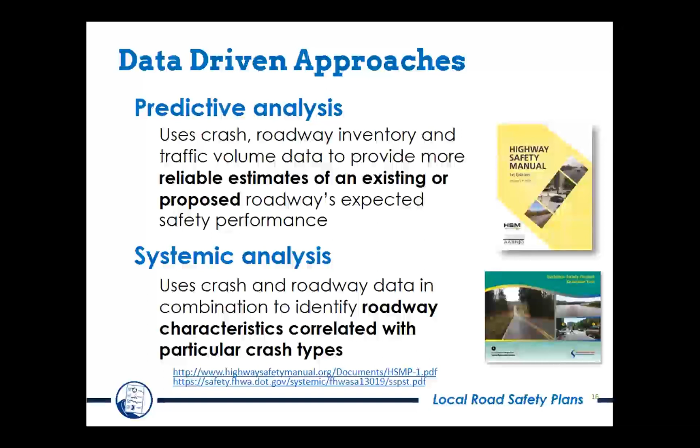So, very rigorous approach. Just to tell you a little more about systemic safety, really our systemic analysis comes from medicine. They've done this in health for quite some time. If you think back to the last time you went to the doctor's office, before you even saw the doctor, you filled out a form, right? They wanted to know about your family's medical history, what happened to your grandparents, your parents.

They wanted to know about your personal health history. How often do you exercise? How often do you drink alcohol? Are you a smoker? Then they might have you test your blood just to see what that shows. That's all before you actually get into the doctor's room, right? They even check your height and your weight. That really helps them look at your risk profile and what you might be susceptible for.

So, if I go in there and they find out that my grandparents all died from heart attacks, that my dad is suffering from heart disease right now, that I'm overweight, I don't exercise, and I drink too much, they're going to start really looking at my heart and making sure I'm okay, right?

They might even put me on some preventative medicines, like for my cholesterol or something like that. What they're not going to tell me is, well, if you start having chest pains, just come back then and we'll take a look, right? But how many times do we do that with crashes? We think, well, one happened or no crashes have happened. We really need to wait till something happens.

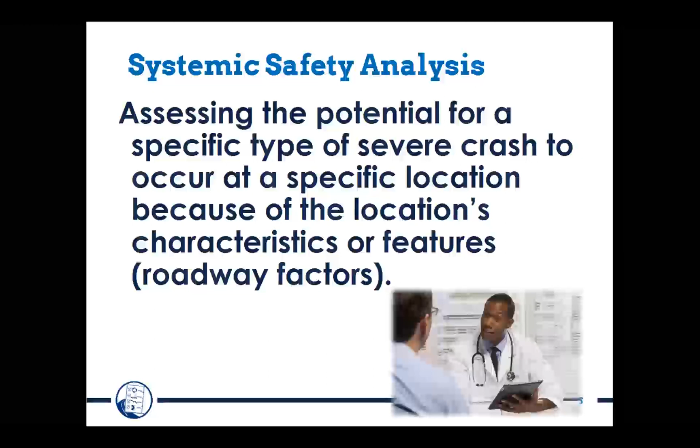And so we can apply this systemic approach to our roadways. In fact, we have an infographic that talks about that, where it looks at the health of your road system, just looking at things that you have access to. This happens to be for curves.

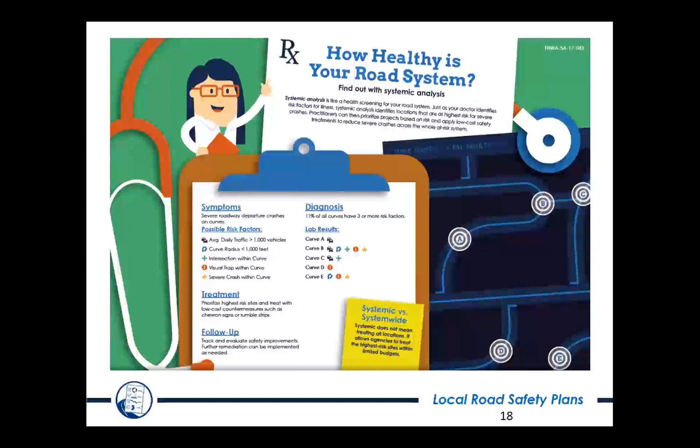So we're talking about traffic volumes. You don't have to have detailed numbers there. Curve radiuses, intersections within a curve. We know that causes crashes. What we call visual traps, where it looks like the road goes straight, but it actually curves. And then using that crash data that you do have can be helpful as well. So that's been a great approach for us.

We do have a local road safety plan template. This is borrowed from the tribal transportation plans. So this can be a great guide for you to work through your plan. Even if you hire a consultant, this could be something that they can use or something that sort of helps guide you through that process.

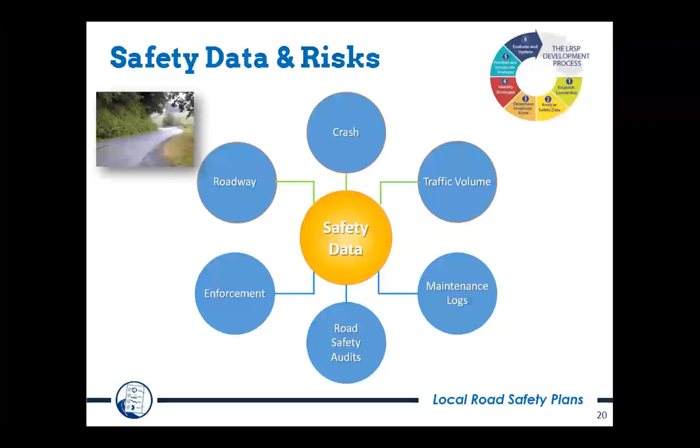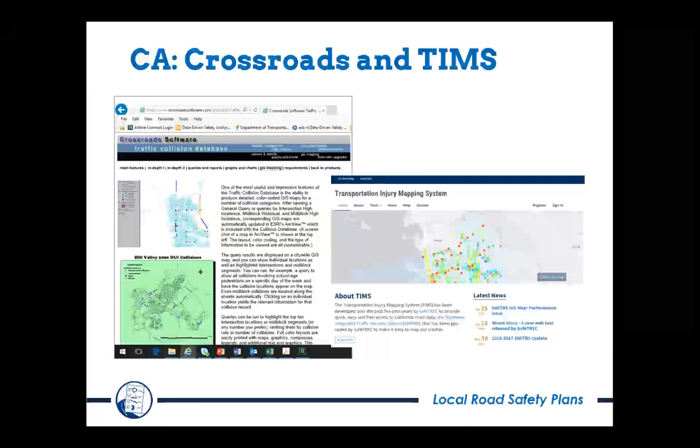So just touching on that data again, you don't have to have great data. A lot of times our own agencies have data, right? Our maintenance forces have data. We have sign inventory. So we might know a lot more than we really think we do. And we want to leverage that information. So in California, you guys have great information with Crossroads or TIMS. It was really great to work with you guys on your data systems. Not all states are at that level, I'd say.

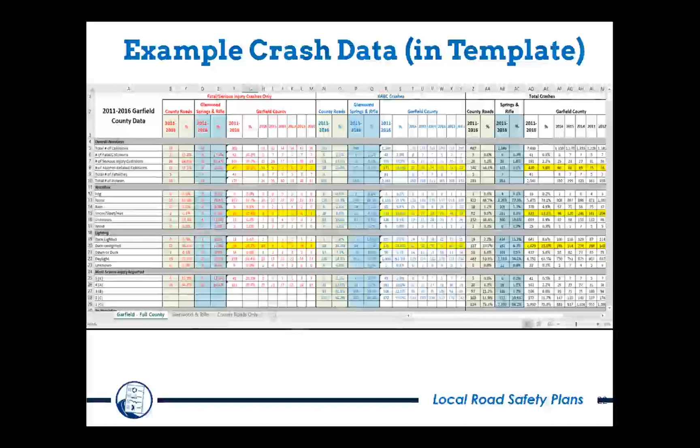We've seen a lot with curves and that have come up, some improper turning. You'll hear some of those as we talk about, or you hear from the others today.

We've also taken a lot of that information and really put it into what we call crash trees. Again, just looking at the data in maybe a slightly different way to look and see where those issues are. So in Garfield County, it was more non-intersection type crashes. They were in rural areas. They were happening during daytime, and a lot of them involving overturning, right? So that's something that helps us kind of figure out where we might focus.

And so we could look at shoulder treatments, maybe clear zone treatments, things you're going to hear about towards the end of today's presentation from Dick Albin.

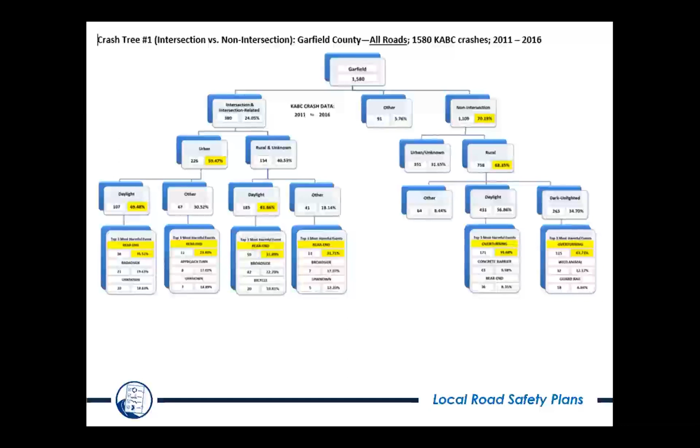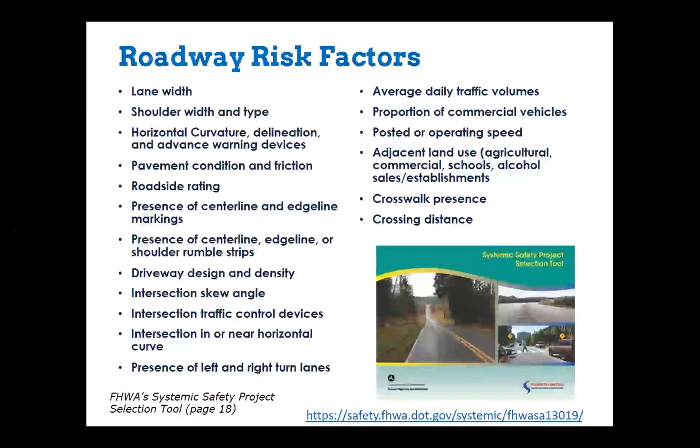So this really can be applied in various areas. So this is just sort of a laundry list, but if you were looking at, say, pedestrian areas, things like the type of intersection control would be a good risk factor. Is there a crosswalk that's present? How many lanes does a pedestrian need to cross at one time? Are there pedestrian signals? If so, what type are they? Is there a sidewalk that's present? What's the adjacent land use? Is there generators for pedestrians? Is there alcohol institutions, those kind of things? Is there lighting? Those can be great risk factors for pedestrians. So things to keep in mind.

Once you've identified those risk factors and determined where those exist on your system, then we can really turn to our proven safety countermeasures. FHWA has a list of 20 proven safety countermeasures.

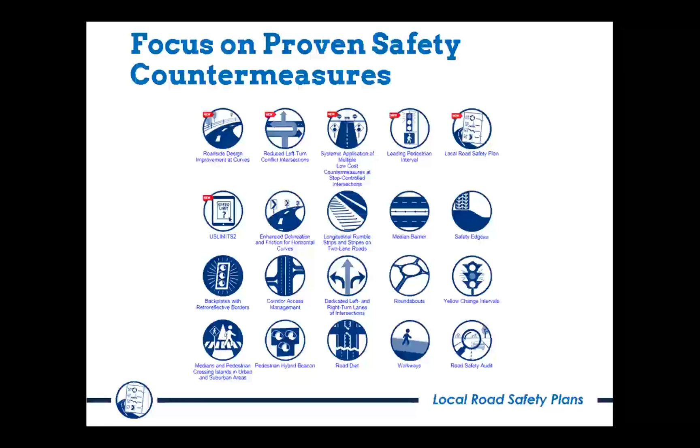There's 6 brand new ones you see there at the top that can deal with those kind of day-to-day things. These are all low-cost type improvements that can be implemented on a wide basis, looking at that at-risk system to effectively address those crashes. Our sister agency, NHTSA, also has a document called Countermeasures That Work that can be helpful for law enforcement, looking at those treatments or strategies that might be effective to help on that human behavior side. There's a number of resources.

I know Caltrans has a number of resources on their website as well. I think plans are a great resource, but we can provide some links to that information if you need. I know the template is on the California's website as well. So we certainly look at implementation, right? That's key. A plan by itself doesn't save anyone. And so we certainly want to talk about those things. And that's really where the plan can help get us to implementation.

This is just one example from Thurston County, Washington. Scott Davis, if you know him, has been a part of our team on the NACE side. Scott Davis has been a safety champion his whole career, but until he looked at this data in this way, he didn't realize his county was experiencing more crashes at curves than his peer group, than the rest of the counties. And so they ended up looking at all their curves. They had 270 that they identified for improvements. They used those proven countermeasures, things like chevrons, horizontal alignment signs, enhanced edge lines, maybe rumble strips, and he got a 35% reduction in his targeted crashes there. So really effective in what he's been able to do.

As I mentioned, we've got some great California local road safety plans. You're going to hear from 2 of those that participated in the pilot and 3 that are really, I think, outstanding. So I won't take much time there. I hope some of your agencies participated in a peer exchange that we hosted in February, that Sac State hosted, that we helped speak at and helped with the agendas. We have another one of those opportunities coming up in October that will be more geared to those southern agencies there in Camarillo. So mark your calendars.

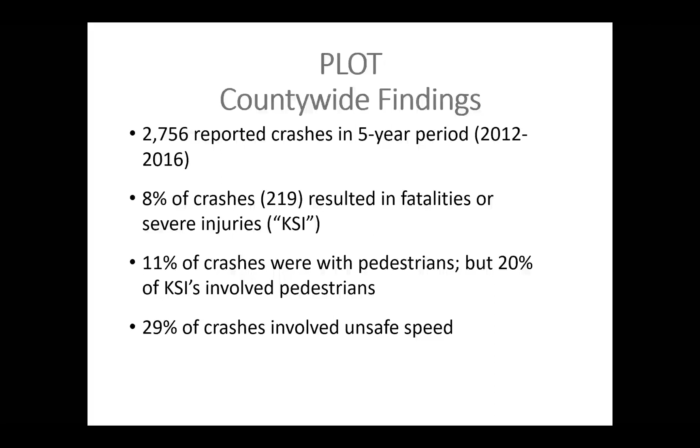Some findings from the report: over the five years, 8% of crashes were fatal or severe injuries, but 11% involved pedestrians, and 20% of killed or serious injuries involved pedestrians, and about 29% of crashes involved unsafe speed.

In terms of our proactive collision analysis, we identified a list of high-risk locations of collision patterns and developed a list of countermeasures to address those, both low-cost short-term and higher-cost long-term.

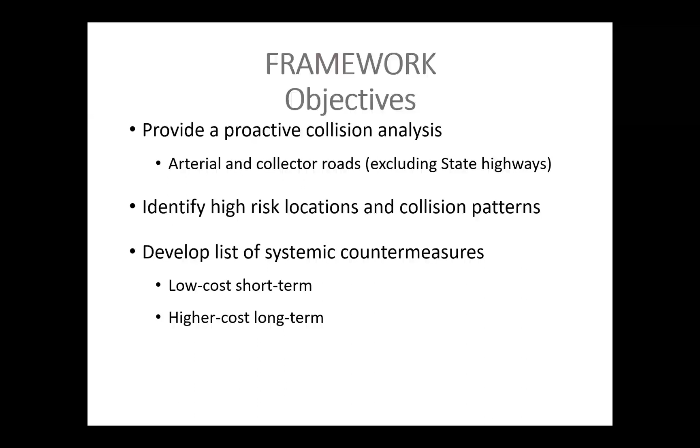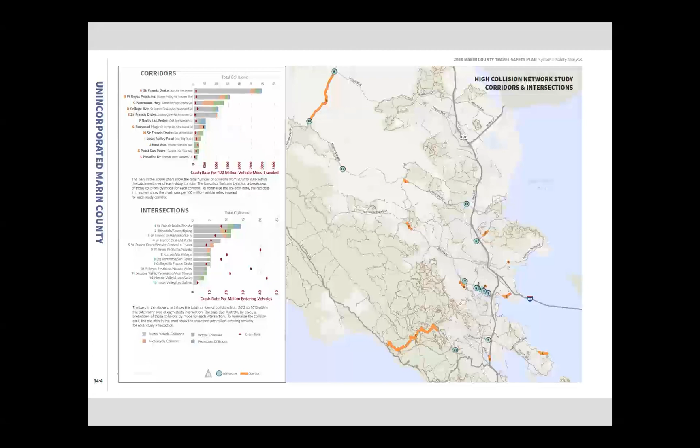This is a sample of the corridors and intersections where we identified high-risk locations of collisions. We broke it down so each city and town would get a list of 10 locations for collision road segments and collision intersections that had high numbers of collisions or were predicted to have a high risk of potential collision. We worked with the different agencies to prepare an individual chapter providing a summary that identified those 10 locations and countermeasures.

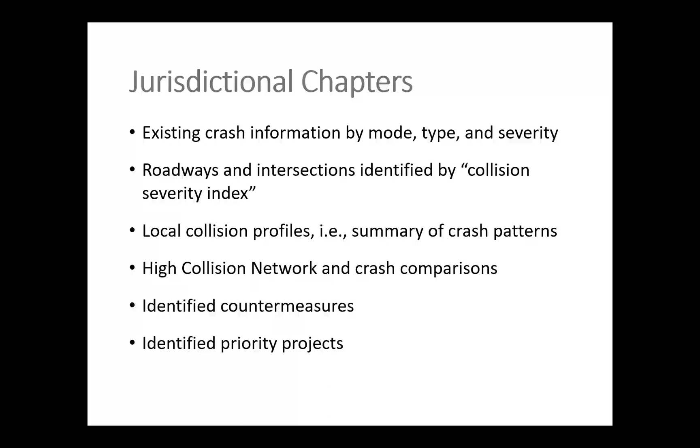We further worked with the jurisdictions to prepare a prioritized list of locations and intersections they would consider for improvements.

In terms of mode, our motorcycle collisions were 11% and our bicycle collisions were 22%, which was much higher than other jurisdictions within Marin County.

Some of the other jurisdictions, the cities and towns, had more pedestrian collisions than average. So we had a bit of conflict in the story, in terms of what to focus on for a regional priority.

One area in Marin County was a high number of solo bicycle, solo motorcycle, and solo motor vehicle collisions, which came as somewhat of a surprise. I was expecting solo motorcycle run-off-the-road at curves, but the solo motorcycle and especially the bicycle numbers were a bit of a surprise.

We found a number of steep roads with bicyclists taking the downhill very fast and sometimes losing control of their bicycle, not even necessarily at a curve.

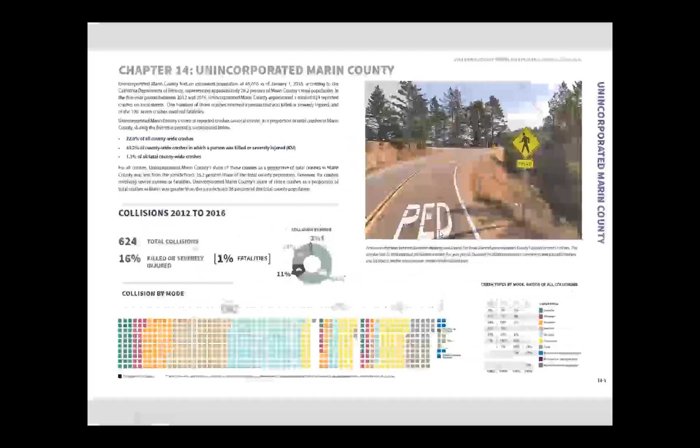This is another sample of the summary sheet showing how we presented the data to the Board of Supervisors and others, to develop further plans and work with our agencies and law enforcement.

Again, we identified the countermeasures, broke them down into potential projects by corridor and intersection, and then ranked them. These would be the priority projects and countermeasures for the unincorporated area.

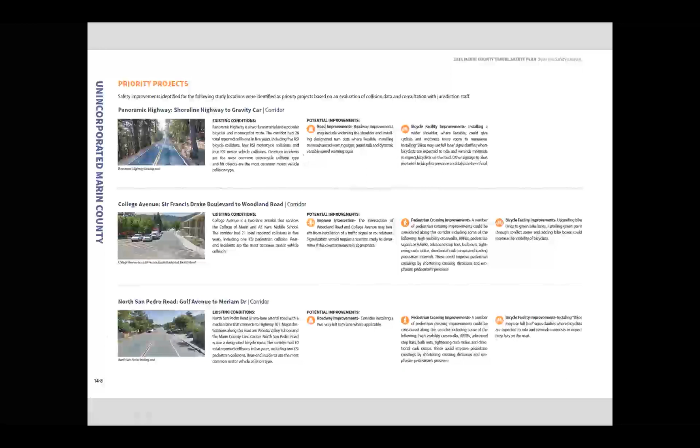And then here's a sample of how we presented the priority projects, where we discussed the existing conditions, potential improvements, and broke it down by road improvements or bicycle, broke it down by mode, so we could focus on the trend as well as the engineering improvement or capital improvement.

And this is the hook for the next steps, is what we did with the information that we gathered from our systemic safety analysis and travel safety plans. We applied for 3 highway safety improvement program projects, and were actually awarded the 3 in which we applied for. We did this countywide, so it wasn't just the unincorporated area. So each of the cities had their 3 priority projects, but we worked together with consultants to identify what were the highest priority projects for the region as a whole. 2 of which were in our cities.

San Rafael and Novato had engineering projects that included some pedestrian improvements. But we also identified through a systemic analysis 26 intersections with signalized intersection improvements, including flashing countdown heads, lead pedestrian intervals, back plates, and other items to help improve safety at those intersections identified in the report.

We're continuing to work collaboratively together with our various agencies and jurisdictions to identify region-wide goals, each of which there's interest in continuing to contribute, such as developing maybe as a region towards 0 deaths or Vision Zero policy with objectives. We're also discussing education, media programs to focus on some of the trends such as pedestrian, bicycle, or motorcycle collisions that had high numbers of killed or serious injury collisions. And we're working to develop the work plan and guiding principles to implement this, which we hope to have completed by the end of this calendar year.

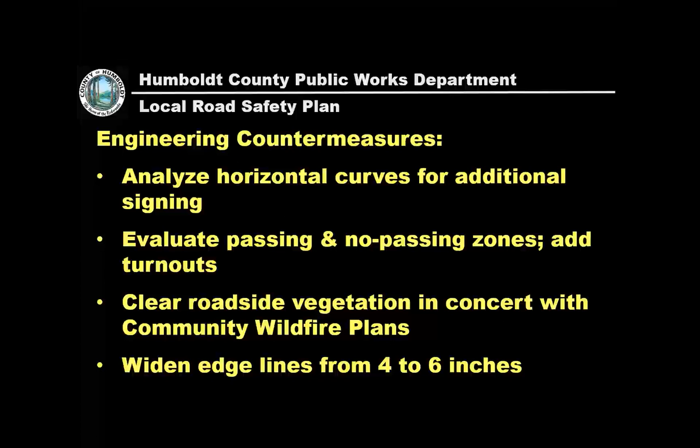As you can see, this guy was tired of his house getting hit, so he put up bollards in front of his house, and nothing has happened since. But we're very concerned about somebody hitting those bollards - it's on private property.

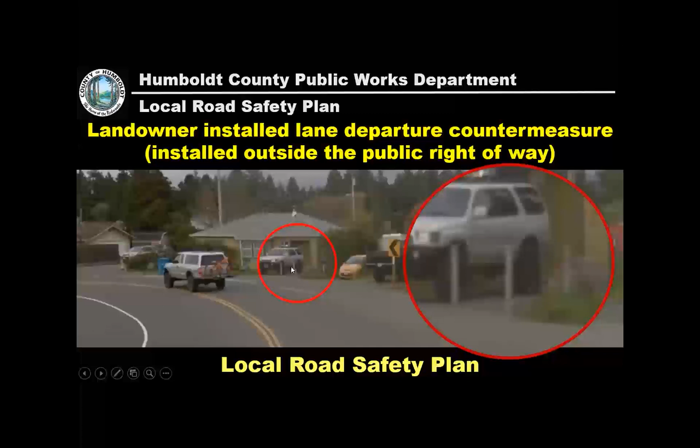And despite all the engineering in the world, DUI is still a problem. Tessa was 16 years old when she was crushed to death by a repeat drunk driver. As an engineer, we think, what can we do about that? Not a lot. Well, you can. In Humboldt County, DUIs are about 16% of all our crashes, but 38% of our fatal and severe crashes. So reach out of your box.

Under the state highway's strategic highway safety plan, there's an alcohol challenge area. I'm trying to bring our county together, and I've got good support from our district attorney, public defender, probation, and sheriff to develop what's known as a 24/7 pilot program for repeat DUI offenders. It's not anything Public Works is really going to be involved in, other than I went out and found a tool nobody else is using to bring to my community. The 24/7 pilot program hopefully will move forward - it's got dramatic effects in reducing recidivism with DUIs, which is also why my public safety officials like it. It has a lot of positive effects on other alcohol-related crimes, such as domestic violence.

So Julio, you can bring your presentation up. It's important that we not only have an overall state strategic highway safety plan, but we have these, what I call a mini SHSP, or local road safety plans, that are applicable to what is most important to the locals. And that's what you're seeing here today.

I'm also going to put in, just before Julio starts, a plug for anybody that's interested in being involved in the California Strategic Highway Safety Plan. Tom Matson is a member of the steering committee. He's on a couple of different challenge areas, as well as myself and some other people in the room here. We need more local participants.

The majority of fatals and severe injuries happen on local roads, and unless we have that participation from the locals, your voices aren't going to be heard. The actions that we propose are going to be focused more on the state system versus on the local system.

So if anybody's interested, there's somebody like Tom Matson that you can contact. You can contact myself. You can Google California SHSP, and that'll bring you to the web link, and it'll tell you how you can sign up for different challenge areas through that link. So again, really encourage you to take a look at that if you believe in our goal of towards zero deaths.

So the first 2 presentations you heard as far as examples, those were developed from local road safety plans. The last presenter, as far as a local example, is Julio from the city of San Diego. His plan was developed from the SSARP process. So you're probably not going to see a lot of education enforcement, which the local road safety plan does include the 3 E's: education, enforcement, and engineering, whereas the SSARP is going to focus more on engineering. So with that, Julio, I'll turn it over to you, and we'll see how this goes.

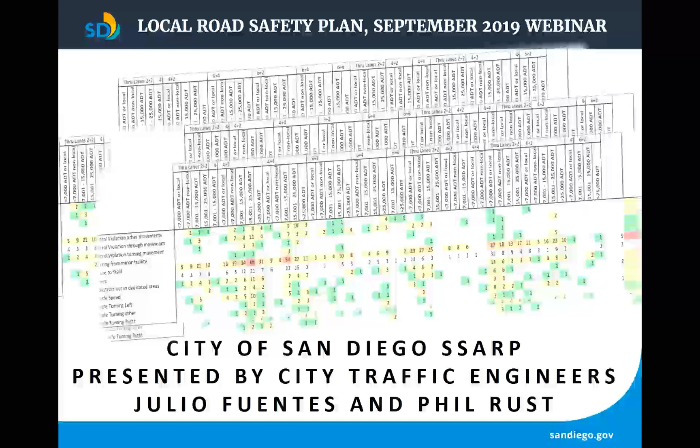Initially, our analysis involved 3 years of crash data from 2014 to 2016, containing approximately 24,000 individual crash reports. In looking at the total number of crashes available, it became clear to us that we should focus on injury crashes. Removing property damage only crashes still left us approximately 12,000 injury crashes, which is enough to obtain statistically significant results. As we will explain later in this presentation, focusing on injuries is the basis for a Vision Zero approach to this SSARP project.

The SSARP methodology is about grouping high crash locations that have similar traits. Instead of the traditional way of looking at individual locations and trying to find crash patterns, we are now looking at crash types across the city network and seeking shared physical features connected with them.

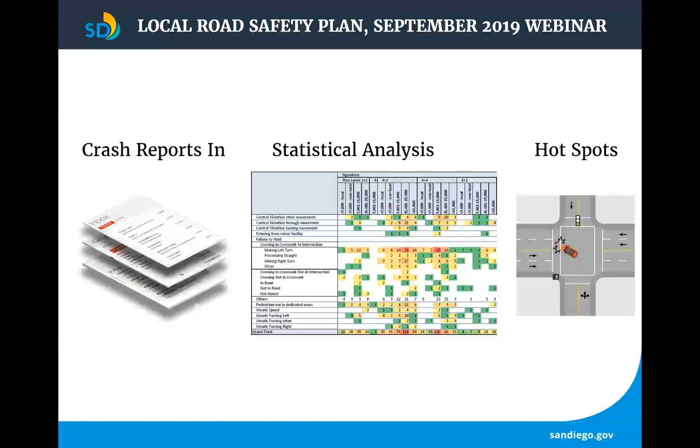A key benefit of systemic safety analysis is that the results yield many locations, which can be improved with low-cost countermeasures. These low-cost countermeasures can cover a much wider area and are focused on correcting or improving a specific crash type. This approach may not be quite as effective as other more expensive options at a single location, but since it is effective at so many more locations, there is a greater potential return on the investment.

The data is first separated by location. This is important as different countermeasures will be considered depending on where the crashes happen. The settings are the intersections, the intersection influence areas, and mid-block locations.

The initial look at the data showed that most crashes, including severe and fatal, are concentrated at intersections. Therefore, our analysis is focused at intersections.

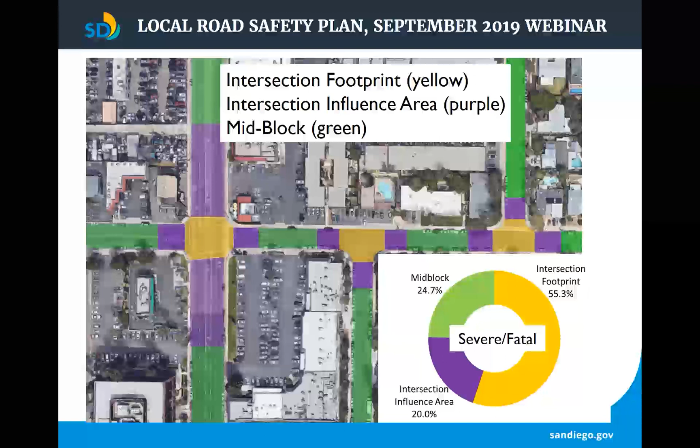We then separated the crash data by mode: pedestrians, bicycles, and motorized vehicles. We did not separate motorcycles from cars, which is something we will do when this process is repeated in the next two years. This process leads to the identification of specific hot spots or roadway environments with similar crashes.

Now we will look at one sample matrix: pedestrian collisions within intersections. Each column represents a unique roadway environment.

The roadway characteristics used in these columns are control type for the first level, whether it be a signalized, all-way stop, or a two-way stop intersection; the number of through lanes for the second level; and the ADT, or average daily traffic, for the third level.

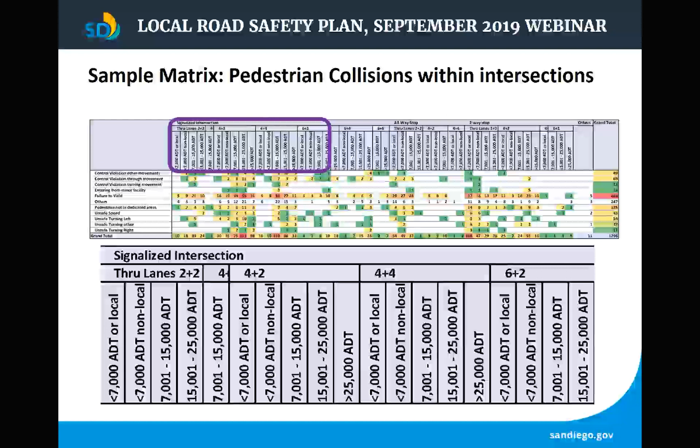When populating the rows, we started with behaviors contributing to the collisions. So we started with collision violations as shown in the crash reports. This is different from the way we analyze crash data in the past. We have always focused on crash types and not on the types of violations.

This approach proved to be very useful when breaking down the data further in order to find very specific crash scenarios.

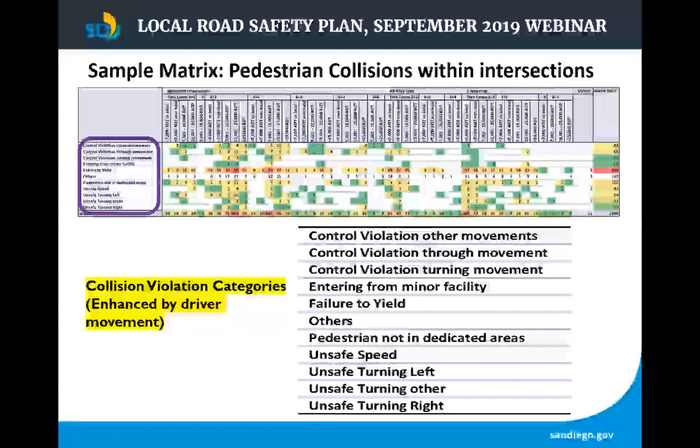The number in each cell represents the number of crashes of that type in that roadway environment. Green cells represent the lowest number of crashes, and red cells represent the highest number of crashes. The red cells with the highest numbers represent hot spots.

Failure to yield rose to the top of the list, but we still did not have enough information to understand what was happening.

So we needed to break down the failure to yield violation category further, first by the pedestrian's movement, and then by the driver's movement. At this point, it became clear that we had discovered two hotspot environments that had the same violation: the driver is making a left turn or a right turn and failing to yield.

From the pedestrian, the action is crossing in crosswalk at intersection. When we match the red cells with the roadways at the top, then we can describe those as hot spots.

All pedestrian and vehicular hotspot environments identified were at signalized intersections. For this particular case, one was a 4-lane street crossing a 2-lane street with an average daily traffic range of 7,000 to 25,000 cars per day. Our downtown is mostly 3-lane, one-way streets, and it has about 175 traffic signals.

The downtown also accounted for a number of similar pattern hotspots, which are shown on the left side of the slide. So this is now very specific.

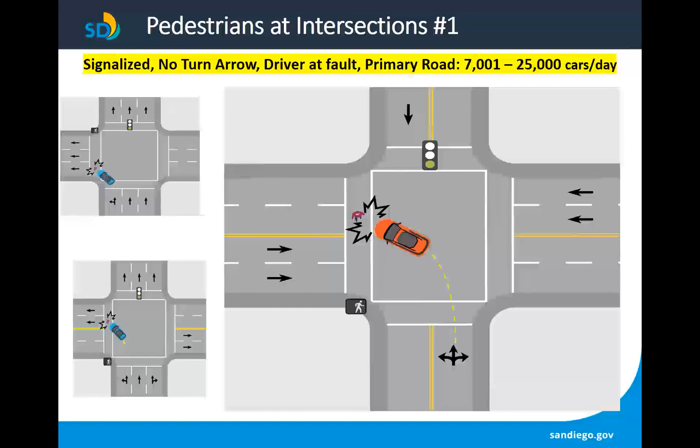The task now is to evaluate each intersection and consider any and all countermeasures that may be appropriate for each situation. All these locations are candidates for LPI with blank-out signs, continental crosswalks, pedestrian countdown signs, and protected left turn if and when warranted.

As we said earlier in our presentation, there are many options to address these types of issues, and some are quite expensive and need a relatively long time to complete. One example would be protected left turns.

However, a lower cost approach is the lead pedestrian interval, LPI, which gives pedestrians the opportunity to enter the intersection 3 to 7 seconds before vehicles are given a green indication.

New York City found LPIs reduced their pedestrian and cyclist injury crashes by 14%, but reduced their pedestrian and cyclist fatal and severe crashes by 56%. Those are very impressive results for a low-cost systemic countermeasure.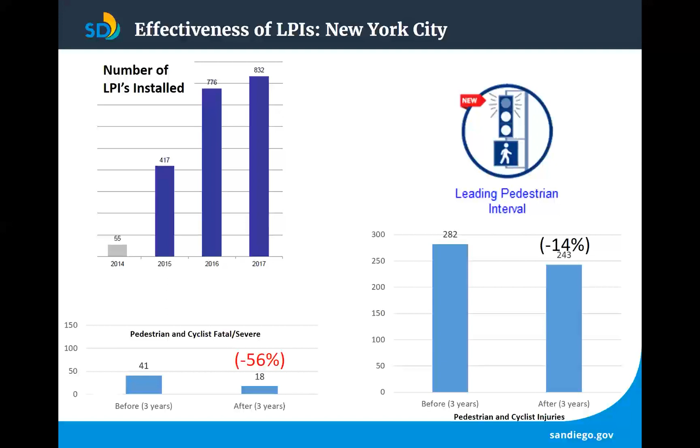The main roadblock to LPIs at the City of San Diego was the need to restrict right turns on red and left turns on red for one-way streets.

We replaced a static sign with an electronic blank-out sign that only restricts vehicles during the crucial time the restriction is needed, just a few seconds out of the entire cycle. This allows us to install LPIs at any traffic signal, not just the ones with light right turning traffic.

We expect the systemic application of blank-out signs with LPIs will also raise drivers' awareness of crossing pedestrians, since it lights up when pedestrians will receive a walk indication.

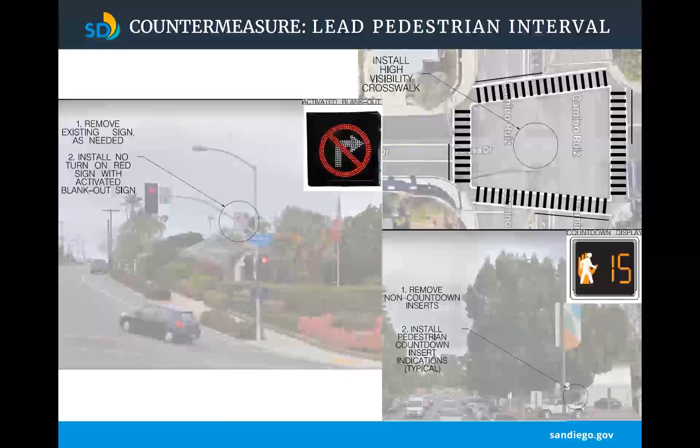We will start with the initial deployment at 66 locations citywide. The slide shows on the left side the citywide deployment of LPI. You can see how it covers the entire city. On the right side is an enlargement of the deployment in the downtown.

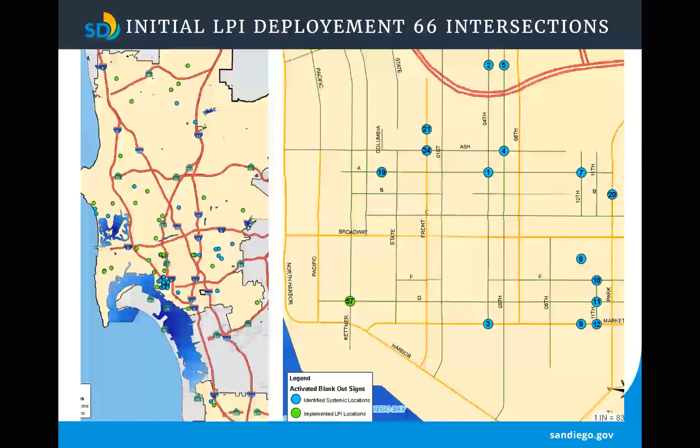Now I'm going to let my colleague Phil Rust summarize our conclusions from all this analysis. Thank you, Julio. Let's see here.

In summary, we are taking the same focus that high injury networks create and applying it citywide to intersections instead, since this is where high concentrations of fatal, severe, and injury crashes happen, and because intersections make up such a small proportion of the roadway network. This combination significantly improves our effectiveness compared to the high injury network strategy.

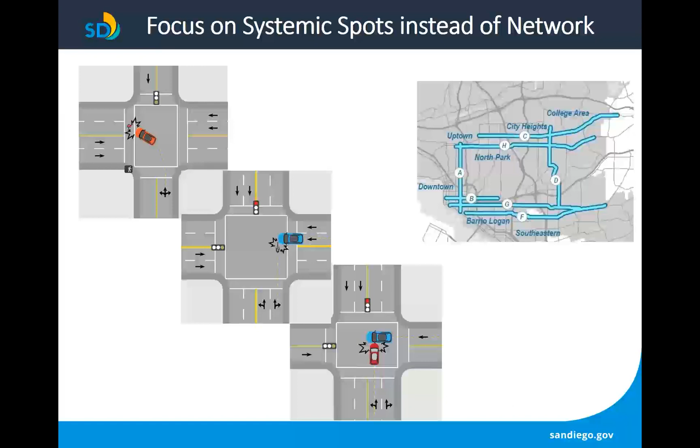In 2008, FHWA began promoting certain safety treatments based on proven effectiveness. This was to encourage widespread implementation and reduce injuries and fatalities. These became known as proven safety countermeasures. Before 2008, we just had a vast array of countermeasures and a few studies of their effectiveness in various contexts. Proven countermeasures give us a shortcut to the most effective ones in most contexts.

Here, in the same way, systemic analysis provides a hotspot shortcut. Our hypothesis is that the same types of intersections that share common crash types in our city also share common crash types in other cities, counties, and states. It shouldn't take much more analysis to demonstrate this, and instead of doing a unique analysis for each city, county, and state, hotspots can be used as a shortcut for where to make improvements, just like proven countermeasures are a shortcut for what improvements to make.

Hotspots and countermeasures can be grouped into systemic projects with overlapping areas taking the highest priority. For example, some of the locations with left-turning vehicle versus pedestrian crashes, right-turning vehicle versus pedestrian crashes, and broadside vehicle versus vehicle crashes all share the same number of lanes and volumes. In other words, they are the same set of traffic signals. So they will be considered first for reflective backplates, LPIs, and left turn pockets.

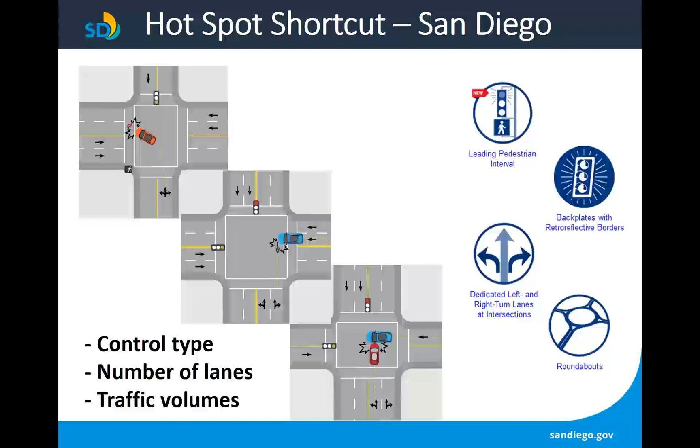We're good. Thank you, Julio. Appreciate you guys presenting on your SSARP. If we can transition over to Dick, I think you can see the differences in the plans, and I'm hoping, I'm not sure if we responded to, or if Julio, if you guys can take a look at the question from Lisa in regards to the matrix that's needed to do these plans for different size cities. If you guys could take a look at that and add your 2 cents worth, I think that'd be great. Will do. So we've gone through the 3 examples.

We're going to shift a little bit into the next agenda item, titled FORWARD. That stands for Focus on Reducing Rural Roadway Departures. Dick Albin from our Resource Center, who's one of a couple people who heads up the roadway departure initiatives, is going to be speaking with us today. He's got some good information on this, since it is a big part or percent of the crashes out there, especially on the local rural roadways. So Dick, if you're ready to go, you're on.

Yep. Okay, well, thanks a lot. Again, my name is Dick Albin. I'm with the Federal Highways Resource Center. We're going to jump right in and talk about safety nationwide.

One of the metrics we usually use is the number of people that get killed on our roads. It's not that we're just interested in fatalities. Serious injuries can be very devastating, but that's what we have the best information for. On an annual basis, as an average over 3 years, over 35,000 people were killed on the nation's highways.

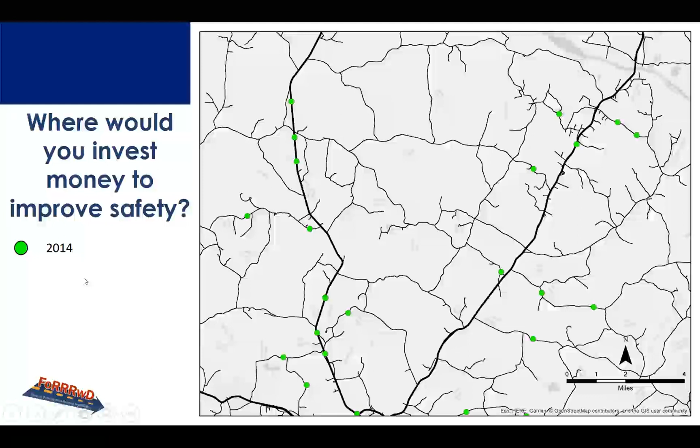The green dots here show fatal crashes that happened in the year 2014. So when you look at this map, and I'll bring up some other dots representing other years, the question is: where would you spend your money to improve safety in this area? So here's 2014, here's 2015, 2016, 2017, and 2018.

Now when you look at that, you don't see many cases repeating. There's a couple where the dots are fairly close together, a couple on the top of the page off to the left-hand side where maybe they're kind of close, but in general they're fairly spread out. Now why is that? Well, it's driver error. Driver error can happen anywhere. So what we find is that especially with roadway departure crashes, they tend to be pretty spread out and fairly random where they occur.

But the types of crashes tend to be the same year after year. When you look at your crash data, usually most states show that about half of the fatalities are from some type of roadway departure, but they're so spread out. Now when you look at intersections, they might be a little bit more concentrated, so that might call for a different approach.

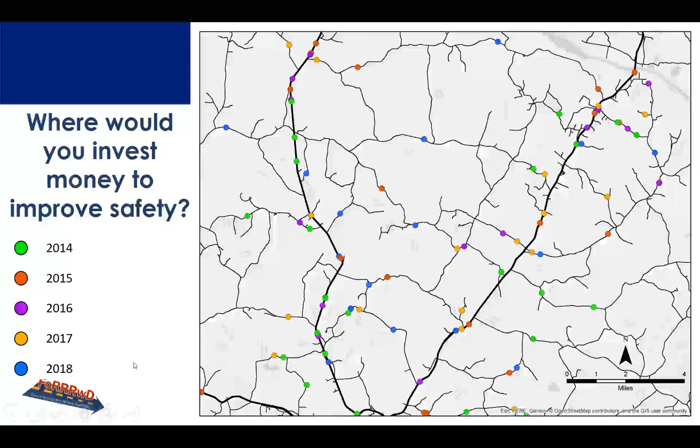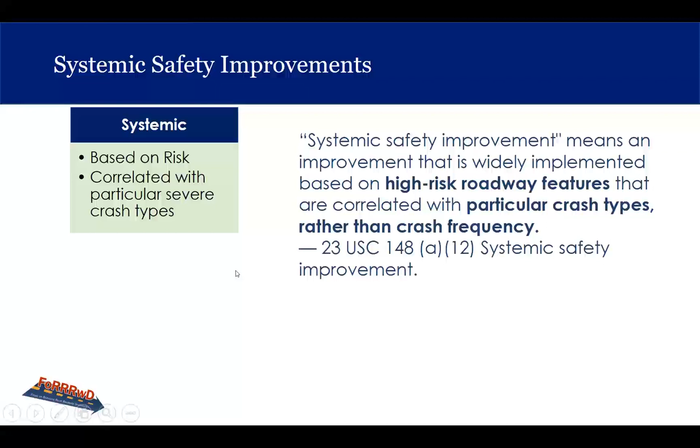So what all this leads to is what we call the systemic approach. With the systemic approach, what we're saying is a systemic improvement means an improvement that is widely implemented based on high-risk roadway features that are correlated with particular crash types rather than crash frequency. We have training that's available, and there's a project selection tool that Federal Highways has developed, with a link you can download it at.

This is actually codified in our laws, that the systemic approach is an acceptable use of federal funds to address safety. I know some people might say, but the way I look at it is, you could have a location that hasn't had a crash in 5 years, but it might have multiple risk factors. Like Jerry talked about when you went to the doctor, you might have multiple risk factors, and it might be that it's going to have the crash next year. But if we can get to it before that crash happens, that's what we're trying to do.

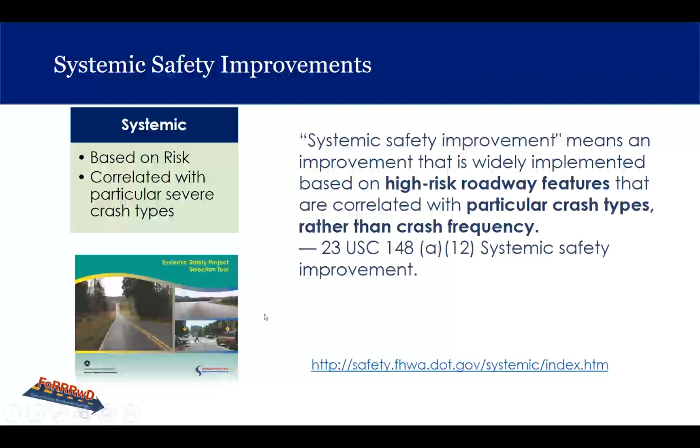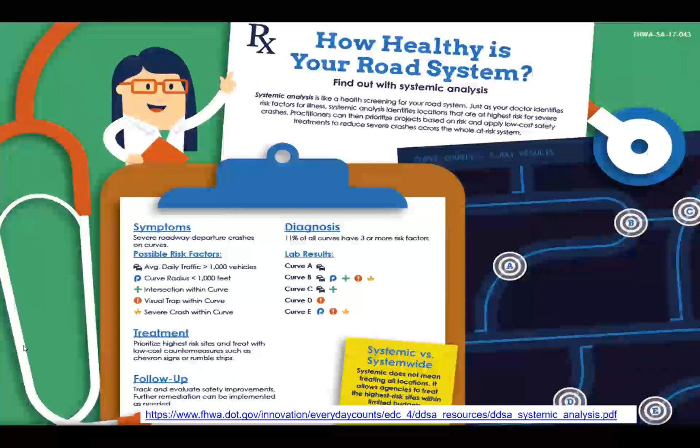I think Jerry already talked about this, going to the doctor and identifying the risk factors. I won't go into too much detail, but if you identify critical risk factors and then look for locations that have multiple risk factors, in some cases you might identify some that haven't had a crash. That's why we say you don't have to wait for a crash to make improvements.

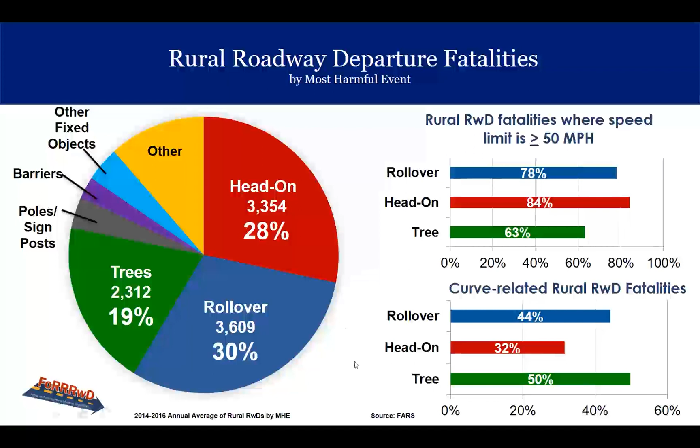We also know that curves tend to be overrepresented in crashes. When you have a curve, it requires the driver to do something, and they may not always do the right thing. They may not slow down, or they may not turn the wheel the way it needs to be turned. So curves tend to be overrepresented. About 44% of rollovers happen on curves, about 1/3 of head-ons, and half of tree fatalities happen on a curve. So if you're not able to do something along a whole corridor, maybe at least focusing on the curves might be a way to prioritize your investment. And it might be the radius of the curve that comes into play as well.

Now, our main topic of this webinar, and one of our pillars in the FoRRRwD initiative, is development of an action plan. Every state has a strategic highway safety plan, and every plan I've looked at has had roadway departures as one of the emphasis areas. Now that's great, but what we want to get to is how can we identify projects to use the available funding that we have, whether it be federal HSIP funding, other state funding, or local funding. How do we identify where's the best place to invest that money? We think that the development of an action plan, whether it be a regional plan, a tribal plan, or a local road safety plan, that's one of the things that can help agencies identify their priorities and help them compete for the available funding.

We definitely want to encourage that. California is already on board as far as the plans that have been developed, and we're hoping to see that more institutionalized within the state.

Now, the last thing I wanted to talk about was our fourth pillar, and that is proven countermeasures. With roadway departures, we have three main objectives. First and foremost, we want to try to keep the vehicle on the road. If we can keep every vehicle on the road, we don't have a roadway departure problem. But we know that isn't always going to happen. Even if we throw all the countermeasures we know work at a location, there's still going to be some cases where a vehicle leaves the road. So then we want to try to reduce the chance that somebody crashes into something if they do leave the road.

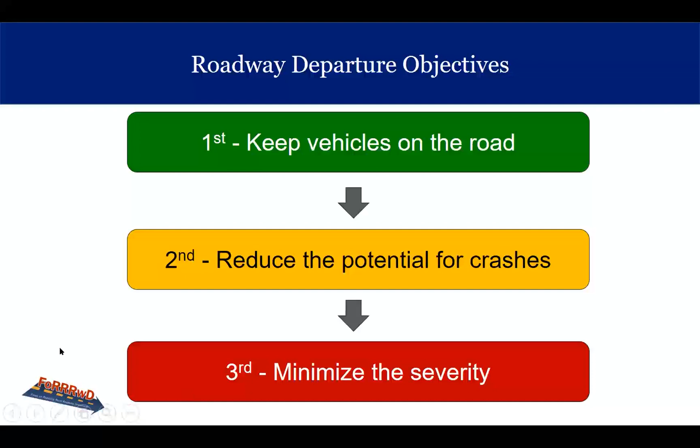On the back of the cards, we show typical application of the countermeasure, what type of crashes it might have an effect on, as well as the crash reduction you might expect by applying these. There's also QR codes so you can scan it and get more information from a website. But the first countermeasure card I'm going to talk about is improved curve delineation.

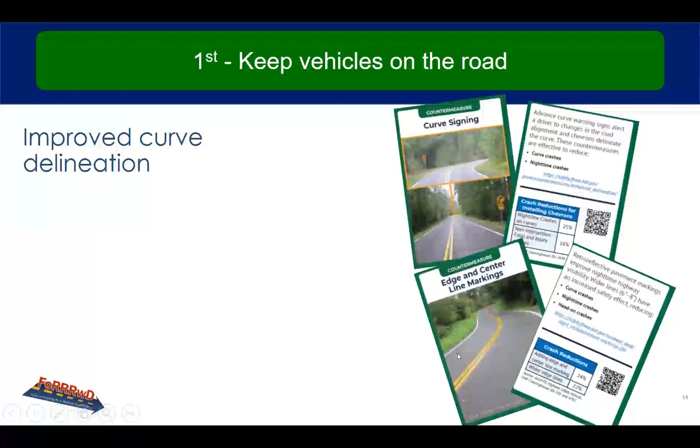So by giving the driver advance warning that there's a curve coming up and they may need to slow down, and also by using chevrons to delineate the curve so they have an idea of how sharp that curve is. We also use edge line and shoulder edge line and center line striping to give the driver information about how the alignment of the road is changing.

Another countermeasure we found very good success with is friction treatments in curves. By increasing the friction available in a curve where you have a lot of demand for friction, we found that is very effective, particularly on wet weather crashes, because that's where you tend to need the friction the most.

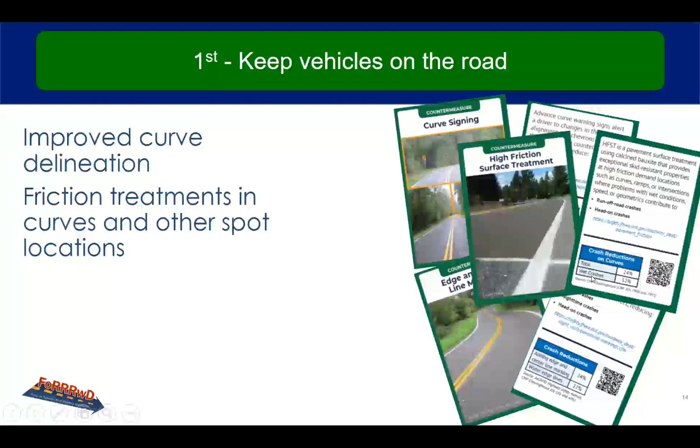Edge line and shoulder rumble strips that alert the driver they're starting to leave the roadway can help keep them on the road, and we've found those to be very successful as well.

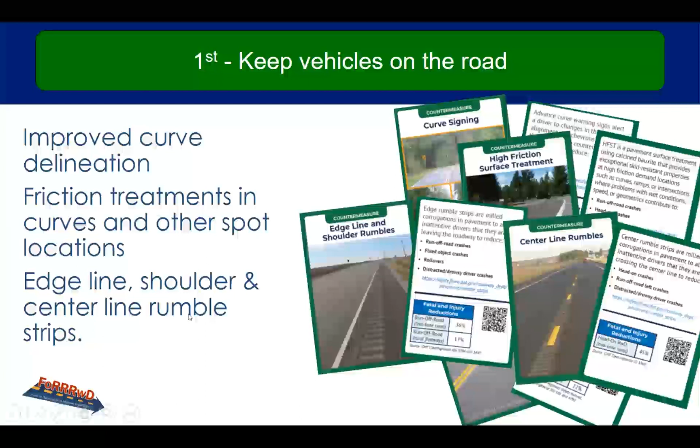Now, when we move into reducing the potential for crashes, we have countermeasures such as shoulder widening, adding in a shoulder where there wasn't one, because that's the first chance somebody has to start recovery if they stray across the edge line.

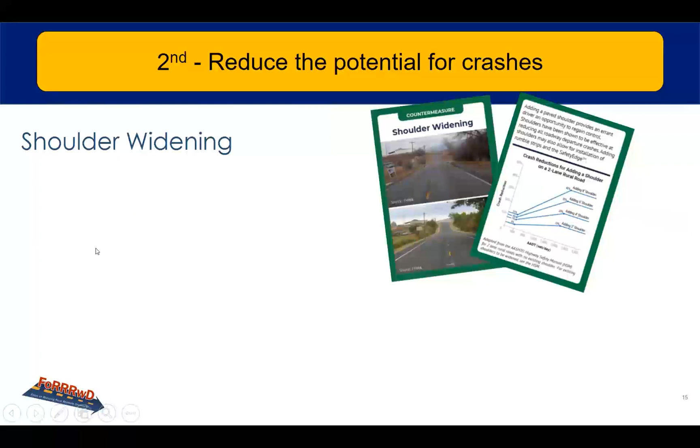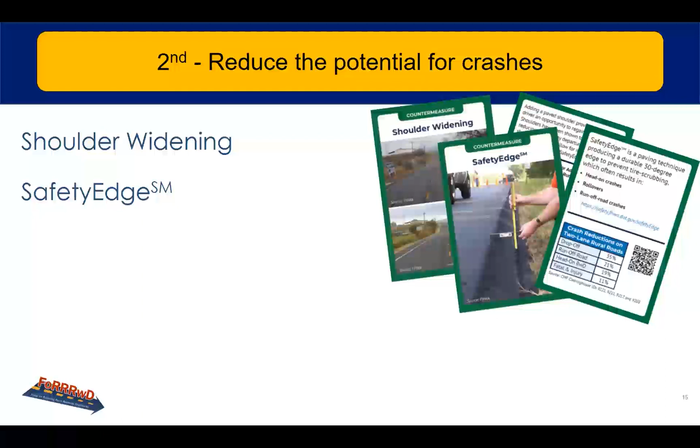There's a SafetyEdge, which is a way of forming the edge of the pavement so that if somebody does leave the roadway and you have any erosion of the shoulder material, you don't have a vertical drop off that they're trying to get back over. It makes it a little bit easier, and we've found very good crash reductions for those as well.

Providing or maintaining a clear zone: sometimes you may not be able to get a full clear zone that's called for in your state design manual or AASHTO, but just providing an incremental increase in the clear zone might provide a significant crash reduction.

Another one is providing the centerline buffer area. This is a little bit newer to us—I think it's been done, but we've actually just gotten some crash reduction information on it. In this case, they narrowed up the lane widths to provide a little bit more room in the shoulder, at the center line.

An NCHRP project that's just finishing up, not yet published, found that by adding just 2 feet on a 2-lane roadway, you can get about a 51% reduction in head-on crashes. If you've got roads with 12-foot lanes or shoulders that maybe can be narrowed up a little bit, just by restriping it, that could be a pretty significant improvement.

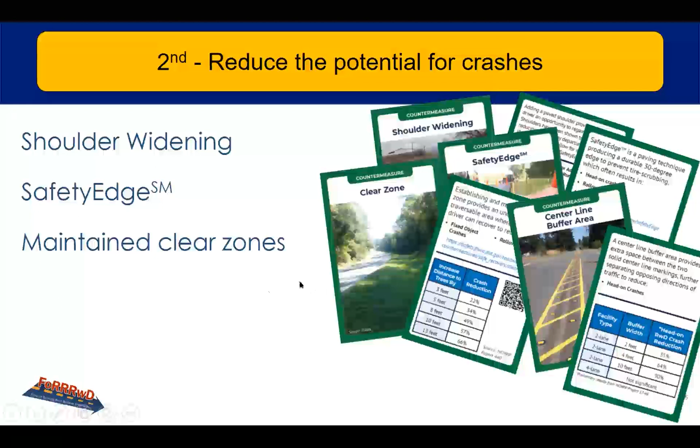And then also providing traversable roadside slopes—sloping out the roadside so that a driver has a chance to traverse over it without going into a rollover. Again, the picture on this card shows a county road where they actually did some slope flattening. So it is possible.

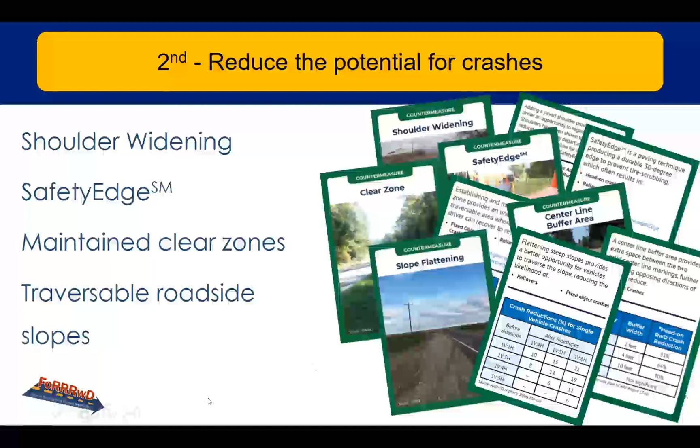Now, our last objective is to try to minimize the severity. If we can't keep all the vehicles on the road, and we can't have a roadside that is flat and doesn't have fixed objects on it, then our last option is to try to do something to minimize the severity.

We can do that by putting breakaway supports on our signs and luminaires, even utility poles. But another major countermeasure is to use a barrier of some sort.

It could be a W-beam guardrail, it could be a cable barrier, but we're trying to keep a vehicle from getting to some object. A barrier is always going to be a trade-off, because we know that if we put up a barrier, we're going to have more reported crashes, since a vehicle that ran off the road before might have been able to recover and get back on before reaching the obstacle. But now they're going to be hitting the barrier, so we're going to have more reported crashes.

But what we're hoping is that instead of having a fatality or a serious injury, now we've got a property damage crash. So barriers are an alternative that, a lot of times if you are tight on right of way or things like that, may be your only solution.

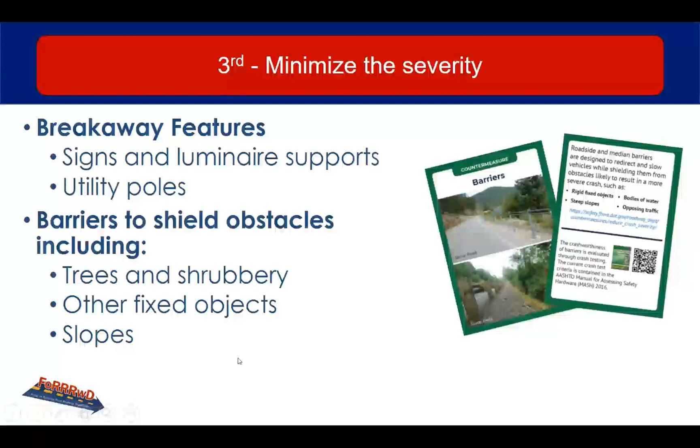So that is the FoRRRwD mission. We want to try to help reduce the potential for serious injury and fatal roadway departure crashes on all public roads by increasing the systemic deployment of proven countermeasures. We're really looking for how we can help you, states and local agencies, to do that.

I am a lead on this initiative along with Kate Satterfield out of our headquarters office. If you have any thoughts on how we can help you, Jerry and Hillary are going to be helping with the local road safety plan peer exchange coming up in October, but we look forward to anything else we can do for you. It could involve training on the countermeasures or on the systemic approach.